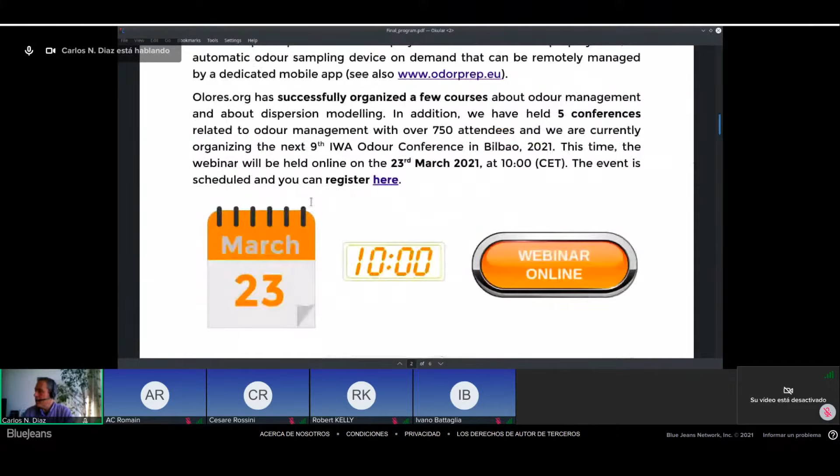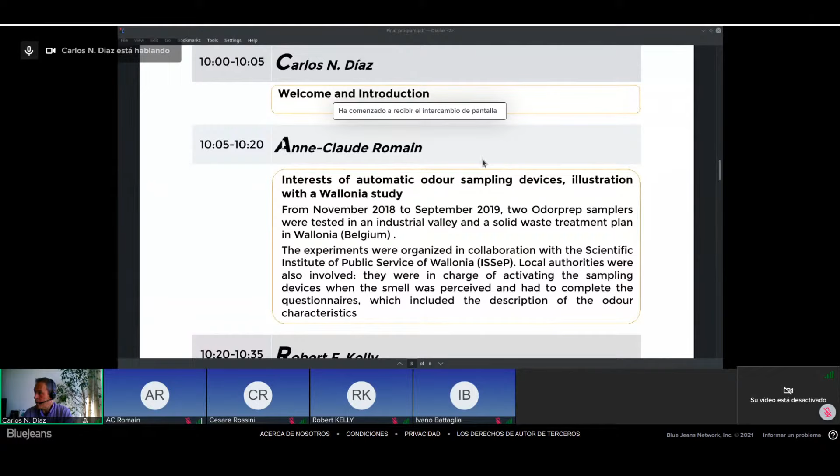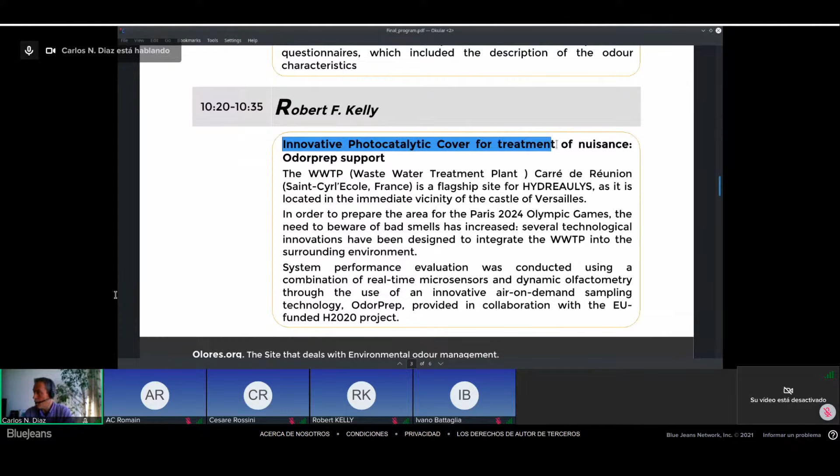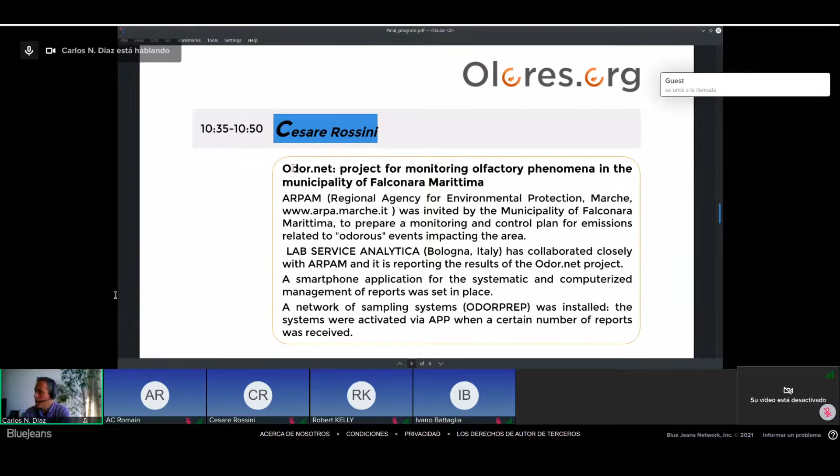So for this presentation, I'd like to comment a little bit on the program. We have first speaker Anne-Claude Romain, who will speak about the interest of automatic odor sampling devices, illustrated with the Wallonia study. Afterwards, Robert Kelly, Mr. Kelly, will speak about innovative photocatalytic cover for treatment of nuisance, Odorprep support. Later, Mr. Rossini, Cesare Rossini, will speak about OdorNet, a project for monitoring olfactory phenomena in the municipality of Falconara Marittima. And our last speaker will be Federico Cangialosi, and he will speak about mechanical biological treatment plants, statistical evaluation of hydrogen sulfide and ammonia concentrations in ambient air, and criteria for automatic odor sampling.

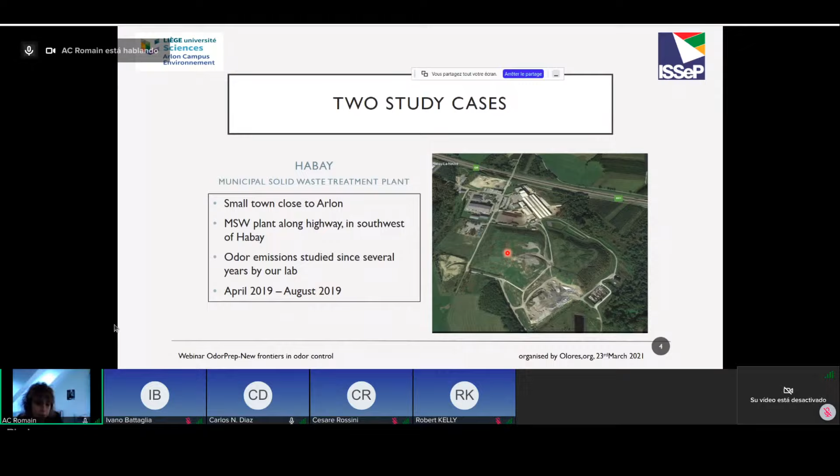So Lab Service Analytica - I'm sorry if I don't use the correct term - Cesare lent us 2 Odorprep samplers for about a year. ISSeP installed 2 trailers equipped with chemical analyzers to perform continuous measurement of chemical compounds. We performed olfactometric analysis, and we used ADMS as an odor dispersion model software.

We also installed our own IOMS, the Instrumental Odor Monitoring System - the new acronym for e-nose - at the Habay site, but I will not focus too much on this today.

What is also important in this study, because there's an app on the mobile phone to trigger the automatic sampling, is to involve external people. In this project we involved 2 environmental officers of the municipality of Engis, and for Habay, a technician of the site, because they have to trigger the sampling with their smartphone, and so they are in charge of doing this.

In addition to this, we give them a questionnaire to fill out at a predefined frequency, and of course each time there is a triggering. This questionnaire, among other things, requires them to mention and characterize the odor they smell, to help identify the source, because as I explained, in Engis there are different sources of odor and different kinds of smell.

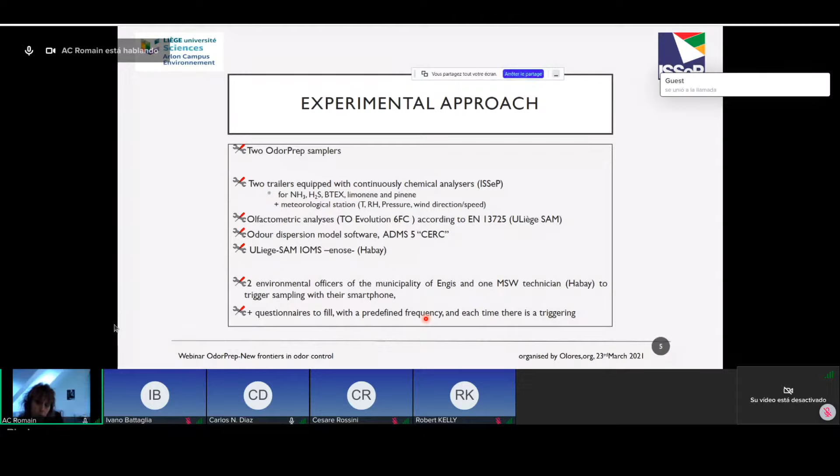So very fast, Engis here, you can see the mouse and the underlying... sorry, I heard something strange. Sorry, it's just the recording. Just go ahead, Claude. Okay.

And so there is an underlying shape here - this shows the different factories in Engis. We decided, for different reasons I can explain later if asked, to localize the sampler here, really close to one of the main odor factories, in the fence line, the parking of this factory, and a little bit further.

The distance is about 350 meters from the parking. It is close to a school, and the officers who have to trigger the automatic sampling are about 1 kilometer, a little bit less, from the automatic sampling system device. For Habay, I will have no time to explain this.

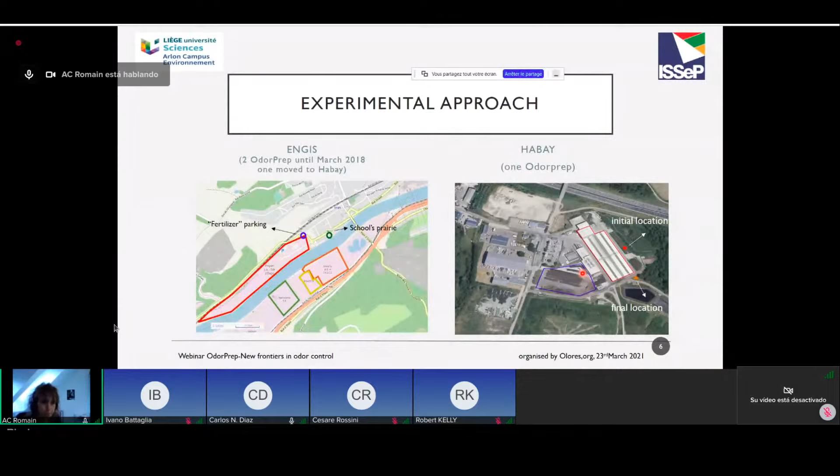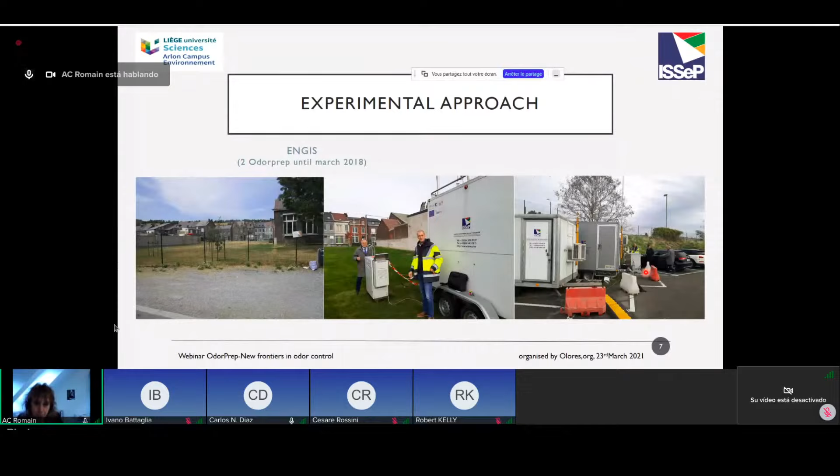I would like to explain more data and results we got in ENGIS, but the time is very short, so I won't have time today to go into more detail. For your information, I will explain them in more detail during NOSE 2021, which is also why I don't want to give too much detail on this result.

But you can see that on the two locations in Engis, we got 6 triggerings, about 5 days during 8 months of study. It's really low, and we are a little disappointed about these results because usually there are more complaints, and we really wanted to get more data for our study. For the citizen, it's great, but for us, it was not so great.

And you can check here the value, the concentration you get, so in the fence line and a little bit narrower, at the receptor level here. We can discuss how we could use this kind of information to perform an odor dispersion model, but I will not take too much time on this today.

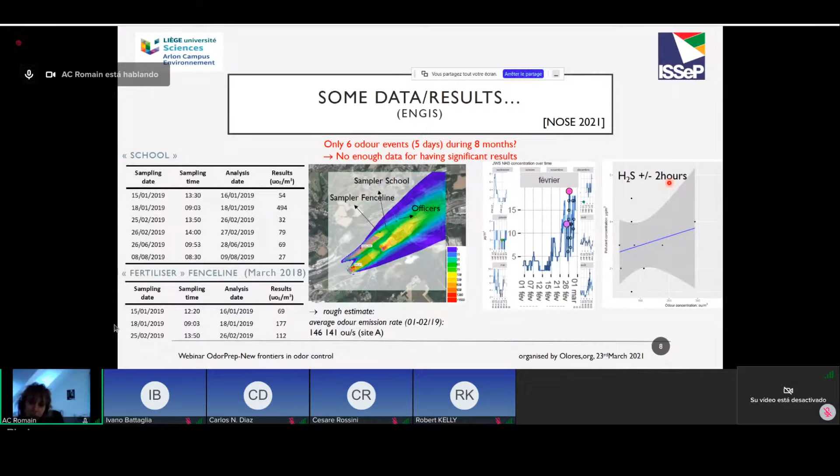This is probably due to the fact that the officer who activates the sampling is 1 kilometer away from the automatic sampler, and even if the analyzer measures chemical compounds continuously, the time the odor takes to reach the officer's nose could involve some delay depending on wind direction and atmospheric stability. So there is something we can discuss here.

So the main scope of this Wallonia project was to evaluate OdorPrep, which is the title at the end of my talk. I'd like to give you my first impression, but this was 2 years ago, so to be honest, I haven't really tried the OdorPrep system since this first experience, for various reasons. Maybe some aspects have changed since that time.

But the good point of this automatic system is that it's really a good approach to collect odor at the receptor level. It's a good way, really a sampling representative of the perception at the receptor level, because it's activated and triggered by a mobile phone app, by a citizen, by an officer, by a company, I don't know. So it's really interesting from that point of view.

As you probably know, sampling at the receptor site is often challenging due to the low odor concentration we have at the receptor, and even sometimes at the fence line. As you all know, especially if you've performed field inspections—I don't know if it's usual for you, but in Belgium it's a method used frequently.

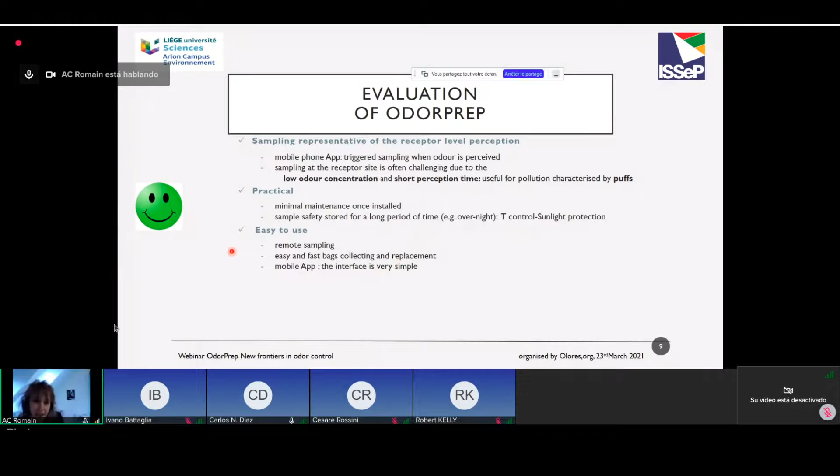So it is easy to use, it's remote sampling, and bag collecting and replacement is really easy to do. The interface of the app is very simple, even for citizens. It's also versatile, so you can add extra instruments with their own sampling line in the device, and it's really helpful from the point of view of material use with respect to our European standard for olfactometry.

However, we had some proposals or some questions that we can discuss, but maybe there have been changes now since 2 years. The trouble could be linked to the electrical supply, because we also have automatic sampling systems with battery.

Because it's quite light we can move it very fast. But here, for temperature control for instance, we need high voltage, so it is important to notice this. If you want to use it, you need access to electrical supply.

The size of the sample bag could be a little bit higher, especially when we are working at the receptor level, because the concentrations are very low.

When we tested the Odorprep system, we only had Nalophan materials at our disposal, but as you know, for some compounds, especially ammonia and H2S, that is not a good one. So I guess maybe they propose other kinds of material.

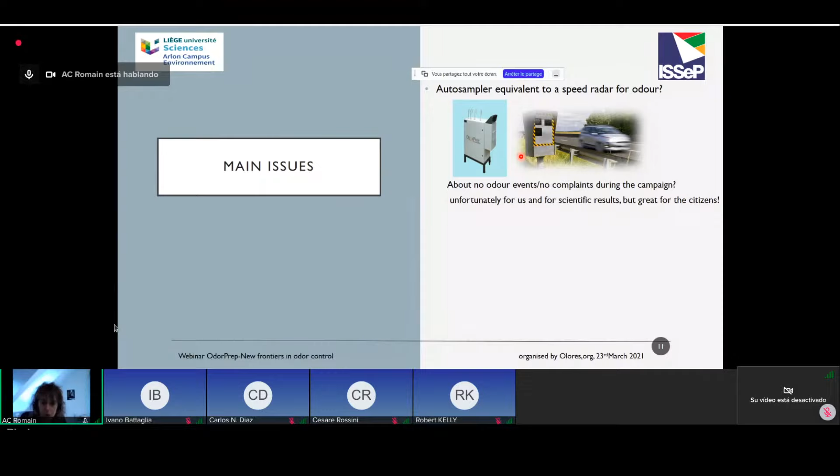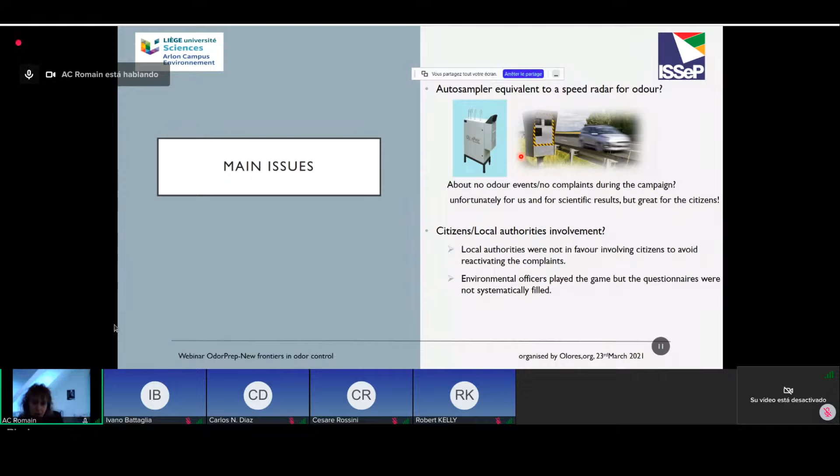Involvement of the citizens was not so nice as we would like to have had, but I have no more time to go into more detail because Carlos reminded me that I don't respect my time as usual. I'm sorry. So I mentioned here the main interest because it was the title of my talk, and I expose here the main interest, but I have no time.

You can read it. However, you will have at your disposal my presentation, and so you can see here the consideration regarding the interest of this system. Thank you very much, and sorry for not respecting perfectly my time.

And thank you to Sébastien. I know he's listening now, and my colleague Noémie, Cédric, David, Axel, and the people who were involved in the 2 case studies. Thank you.

Okay, thank you very much, Anne-Claude. Sorry for this, we just have 15 minutes, otherwise I would be listening to you for a really long time. Yeah, no, thank you guys. I know, it's my problem, it's really difficult to respect the time. Well, sorry. Okay, thank you.

Okay, so our next speaker is Dr. Robert Kelly. Dr. Robert Kelly heads the international team of Suez dedicated to solutions related to odors, located in Paris. Mr. Kelly studied microbiology at the University of Guelph, Canada. Mr. Kelly has a long experience in developing sustainable odor management strategies, including real-time monitoring of nuisance, odor emissions, and impact assessments. So please, Robert.

Today, I'd like to present one of our solutions within Suez, which we call ActiLayer. It's an innovative solution for the treatment of nuisance odors from diffuse sources via photocatalysis. And of course, the link to the previous presentation is how we integrated the use of the Odorprep automated sampling device within two reference projects that I'd like to share with you.

Just to quickly get started, so you have an idea of who our team is, because Suez is a large organization. We're part of a division known as Smart Environmental Solutions, and in fact, we're the Air and Climate division. If you look at our activities, they fall into three main categories.

The first, which we'll focus on today, is really about nuisance odor impact and integrating industrial activities within the local environment. So we're really focused on odorant compounds, volatile organic compounds, H2S, reduced sulfur emissions. We also work more and more on urban air quality initiatives, and you'll see it's similar strategies, but on different types of pollutants, with a link more focused on public health initiatives. So we're talking about fine particulate matter or NO2 emissions.

And then finally, the third category is on surveillance and mitigation of greenhouse gas emissions. So not really an air quality initiative per se, but more linked to climate change initiatives.

But regardless of which of these three areas we're working in, what's important to know is that we operate as a solutions integrator. It means we work with an ecosystem of partners, such as Lab Services, Analytica. We're not only working with in-house solutions, we're trying to bring to our clients the best of technology that's available on the market. And we're present along the entire value chain. It means beginning with a diagnostic phase, typically, to understand, really to characterize the nature of the problem, the type of pollution, the scale. Am I talking about a single source or an entire plant or an entire city?

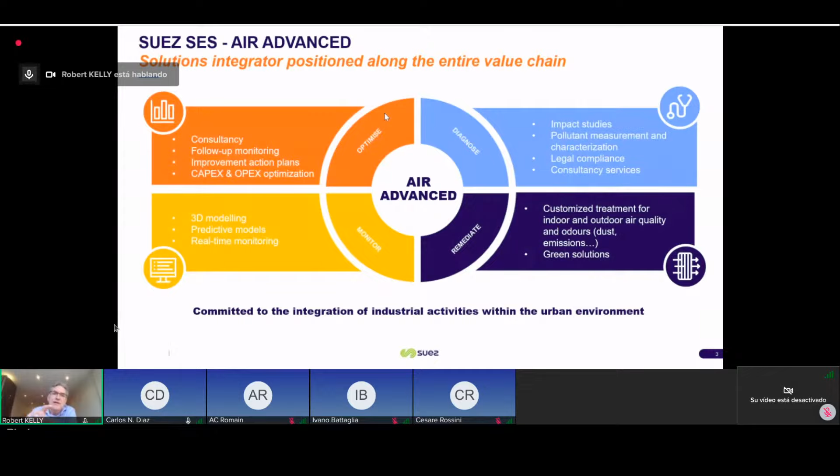And then we move into treatment, remediation solutions. Once we've put in place a treatment system, we have an increasing interest in real-time performance monitoring. And finally, when we have these types of digital platforms, we're building up online databases. And so now we can have a big data type approach, try and optimize plant operations, for example. So we have this continuous improvement process.

But really, irrespective of the project, our main focus, our commitment, is to identify strategies to better integrate industrial activities, industrial infrastructure within an increasingly urban environment. I'm sure many people have noticed that infrastructure such as wastewater treatment plants, composting facilities, landfilling activities, or even industrial parks are really facing urban encroachment.

It means we have residential neighborhoods coming up right up to the fence line of the facilities. And so we have to come up with innovative strategies to go beyond just risk management and to really focus on environmental footprint and really having a more proactive approach in terms of quality of life for the local community.

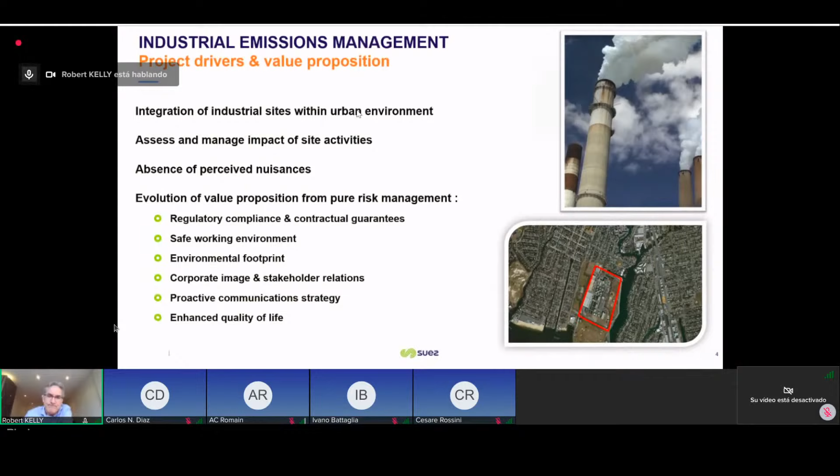So with that, I'd like to focus on really two technologies today. The first on the treatment side is our ActiLayer technology. You can see here an installation that I'll focus on just outside of Versailles. It's a photocatalytic cover. But what's interesting is that it really performs a couple of functions in one. Well, first of all, it's a cover, so we have confinement of emissions. But here you can see a simple schematic of how it's made.

So we have an activated carbon layer, so we have adsorption of any pollution below the cover. We have an integrated titanium dioxide catalyst, which with UV irradiation, so sunlight, is going to produce free radical species that will degrade any pollution that is adsorbed in the activated carbon layer. So we have complete mineralization of the pollution and regeneration of the activated carbon.

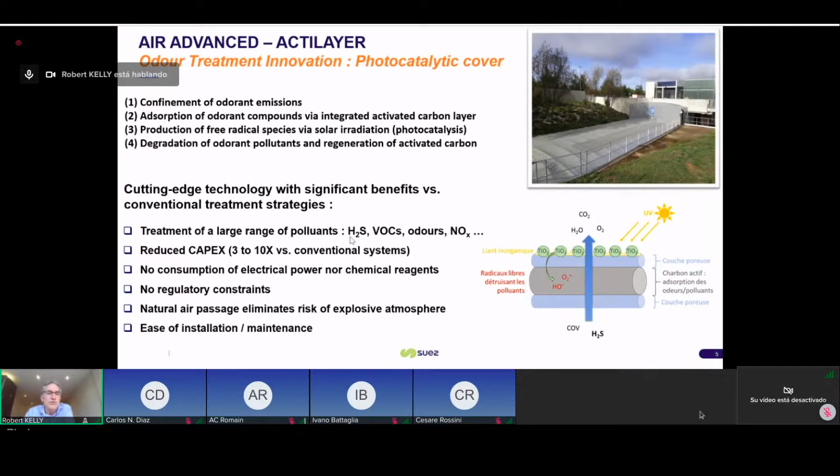So for us, it's a very interesting strategy for treatment of really difficult emission sources, open air tanks or here canals with diffuse emissions, much lower capex than a traditional approach where if I had to put in place a concrete cover, a ventilator to extract the air, and a dedicated odor treatment system. I have no electrical power nor chemical reagents, so very easy to put in place and to maintain.

And of course, the second innovation I'd like to focus on with these couple of references is the Odorprep device. Anne-Claude presented it earlier. Really what is of great interest to us is the ability to do remote sampling on demand by plant operators, by a system administrator in the middle of the night whenever we have an odor event. And also the fact that we can tailor the configuration of the device to have different types of sampling.

So we can have a Nalophan bag for collecting an air sample for dilution olfactometry, or we can put in a Tenax cartridge for VOC screening, for example.

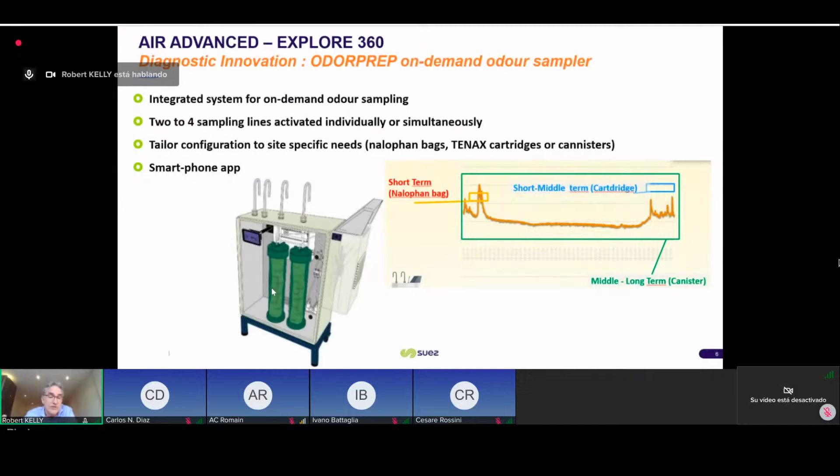Let's walk through two use cases. This is the Carré de Réunion wastewater treatment plant, in close proximity to the Chateau de Versailles. Here's the inlet wastewater channel, an open air channel approximately 200 square meters in surface. There's a new tramway passing directly in front of the plant, and in 2024 the equestrian show jumping events will be located quite closely. The local mayors are very sensitive to this open air source and asked us to come up with solutions.

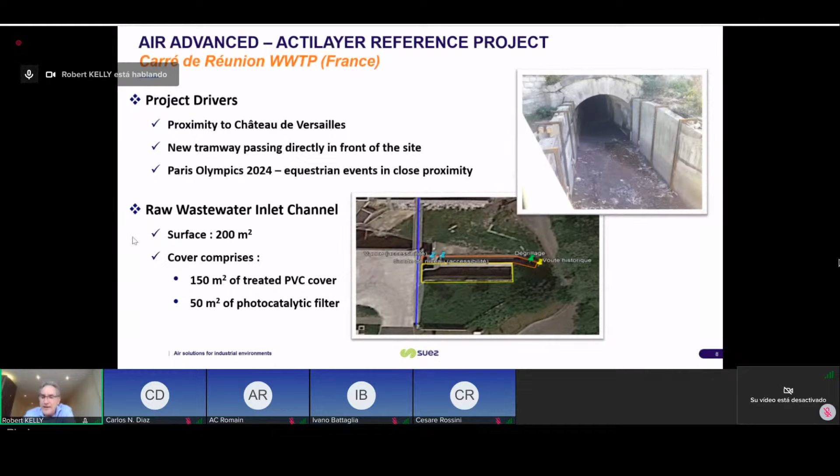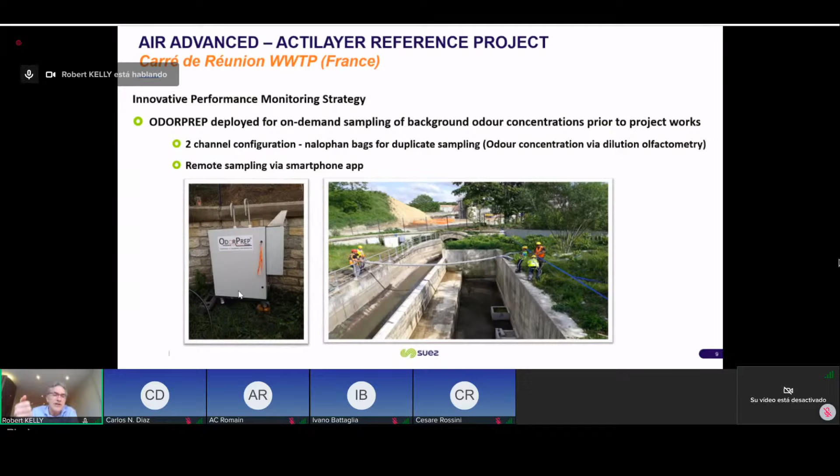After comparing different alternatives, we decided to proceed with a photocatalytic cover. We used the Odorprep as an innovative performance monitoring strategy, first sampling before we put the cover in place over several months to understand background odor concentrations. The Odorprep was configured with two parallel channels, with sampling bags for conducting odor concentration analysis in the lab via dilution olfactometry. We could remotely sample whenever the plant operators told us there was a nuisance event in the vicinity of the channel.

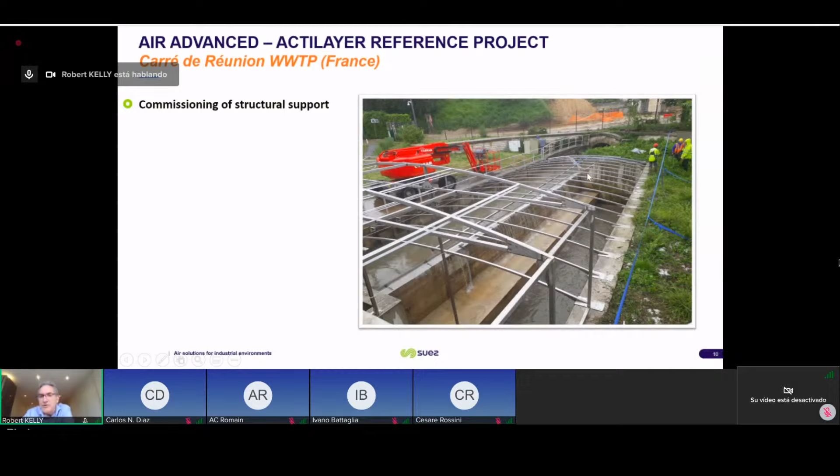Some images of putting the cover in place. We put in a quite sophisticated support structure because the vault was actually a national monument from Louis XIV, so the client wanted to preserve this vaulted look of the overall finish. Here you see us putting the actual cover in place, and a close-up on the photocatalytic filter patch. You have a chemically resistant PVC cover, and then these photocatalytic filter patches placed using heavy-duty Velcro at intermittent intervals integrated within the cover.

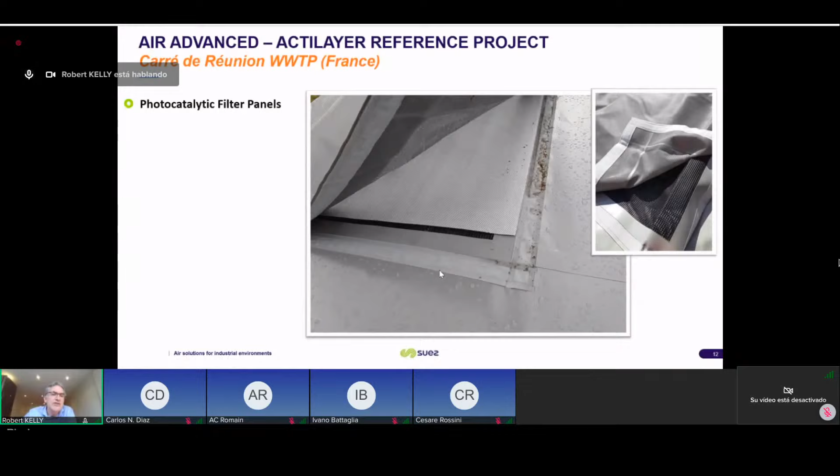We then continued sampling with the Odorprep device once the cover was in place, and we also used microsensor technologies to sample directly in the channel below the cover and directly above the cover.

Using specific measurements both in the lab and with dedicated microsensors, we also sampled for some recalcitrant odorant compounds. Again, we bring it to below detection, and we're above 80-90% removal efficiency.

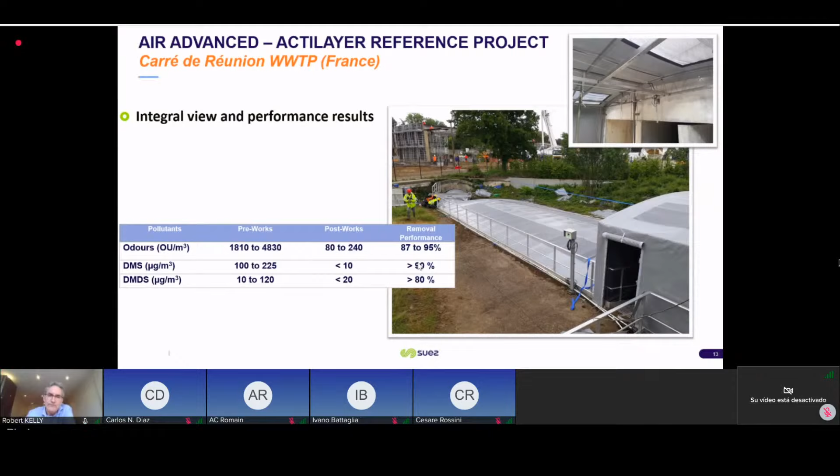Let's focus on a second reference case to give you another idea of how we used the Odorprep. On the first project, it was a loan from Lab Services Analytica, part of an ongoing European initiative to test the Odorprep device. We were absolutely convinced of its interest, and subsequent to that first trial we purchased 2 units for use on this next project.

Here we're dealing with a different type of project: an industrial remediation subsequent to an industrial warehouse fire. This image shows the fire, where a chemical warehouse was storing highly odorant compounds. Our project within Suez and our partner consortium was to demolish the remaining structures and remediate any waste debris on site. We also had a lot of barrels in various states of degradation that needed to be remediated on site.

What was very important for the client was to have real-time air quality monitoring, but also nuisance odor impact monitoring, as a critical decision aid tool to help manage the on-site works with as little impact on the surrounding neighborhoods as possible. This is directly inside the city - we have apartment complexes a couple hundred meters away. This was also highly publicized with a lot of news media coverage, so we wanted a very transparent and reassuring communication strategy.

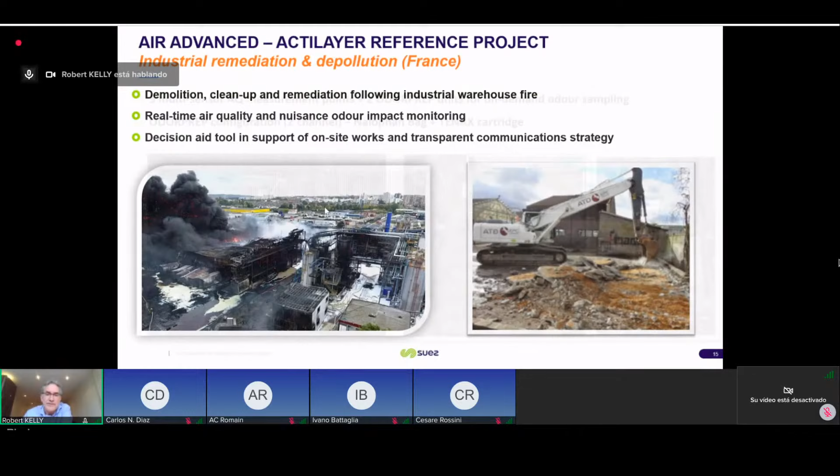What we put in place was a combination of multi-sensor real-time air quality monitoring stations. We put a network of 5 monitoring points around the remediation works.

In this particular case, we configured each of the Odorprep units as dual channel units, with sampling for dilution olfactometry but also Tenax cartridge, because we knew VOC emission screening was a big part of what our client wanted to focus on.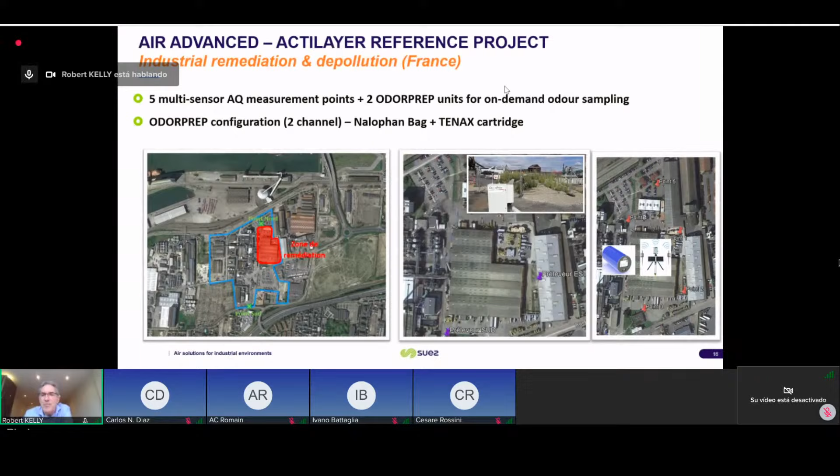The other critical highlight of this project is that we had to build a temporary support, a tent, for handling the most sensitive of the waste. These uncombusted barrels of compounds that were highly odorant were taken inside this tent for cleaning and pre-treatment before taking to an offsite waste handling facility.

So here what we have is a combined ventilation and air treatment system where the photocatalytic filter panels are directly built in - these are coated canvas ventilation gains with the photocatalytic filter panels integrated within one face of the ventilation gain.

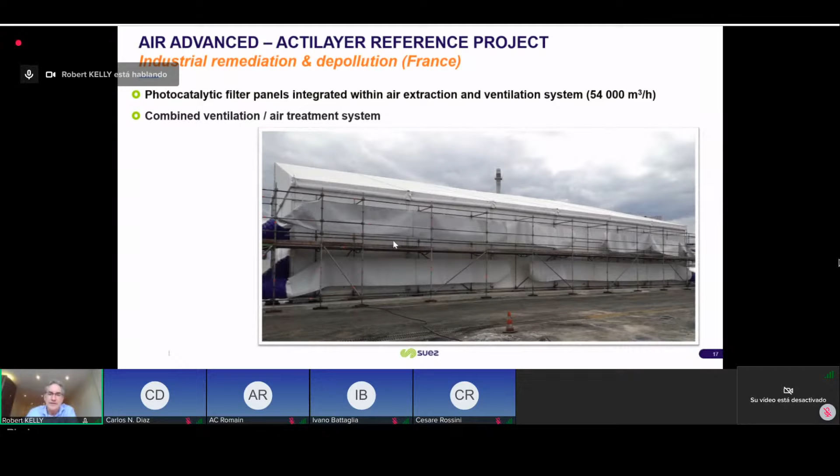Again, we used the Odorprep both at the very beginning of the project when we were testing to better understand what types of compounds we were dealing with and the odorant effects. We used it inside the tent as a sort of pre-screening test initially, where we were collecting samples whenever the operators informed us that we had highly odorant species present.

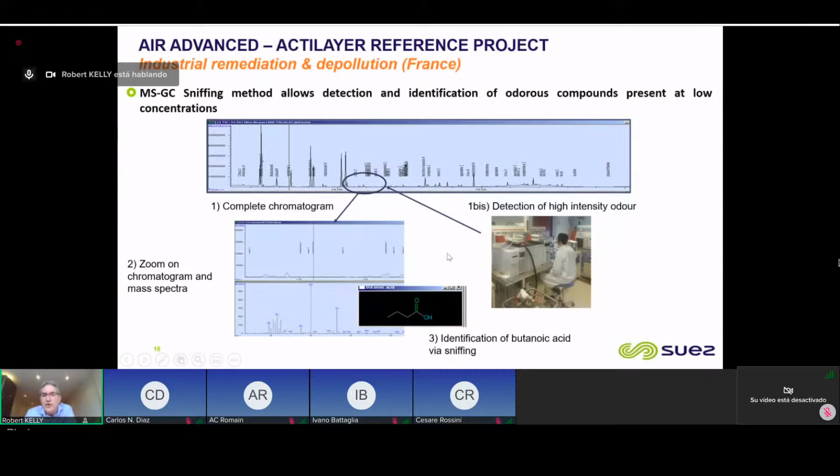We would collect on-demand sampling and then send it to the lab for MS-GC sniffing. The advantage is, even for compounds that were present in very low concentrations but high intensity odor, we could try and identify the compound.

We also used the units once the project was up and running and our treatment system had been properly tested and validated. We installed the Odorpreps at the 2 points I mentioned, at the limits of the remediation works, to survey in real time and do both automated sampling whenever we had a resident complaint, but also programmed sampling, because we had environmental reporting to do throughout the project. So what I can show is that on the limits of the works, we never had odor concentrations that exceeded 75 odor units per meter cubed.

And in the vicinity of the tent, comparing the interior versus the exterior, we showed on the order of 75 to 90% removal of both total VOC compounds and total reduced sulfur compounds. So very efficient performance.

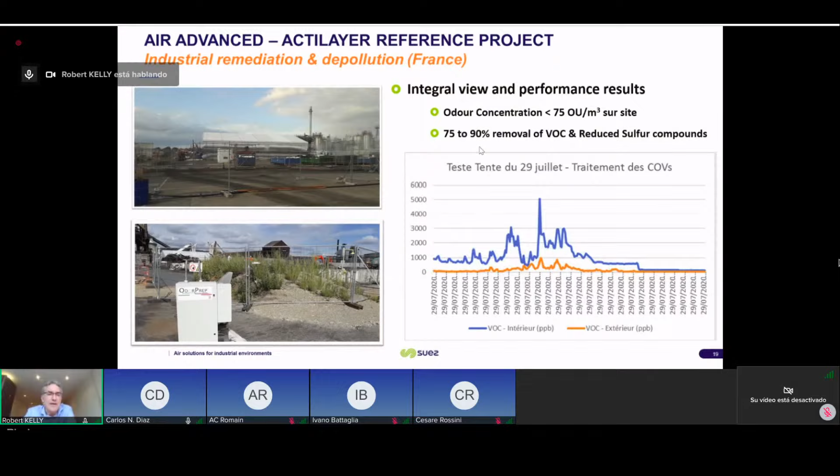You have 1 minute, Robert. And that is the last slide, Carlos. So that works out just wonderful. Fine, I'll be happy to answer any questions later on during the roundtable.

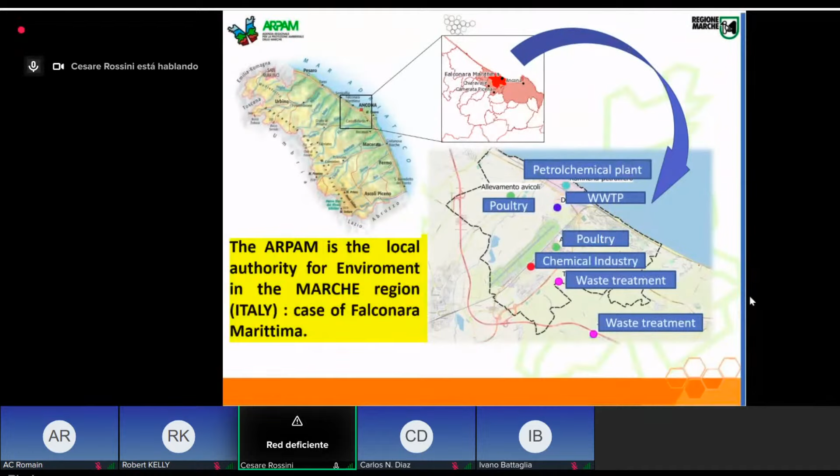ARPAM is the local authority, one of our 20 local authorities that take care of the environment in Italy. In this specific case, the local authority of the region Marche has studied the case of Falconara Marittima, a nice little town on the Adriatic Sea in north-central Italy. The area that ARPAM wants to keep under control has a different environmental pressure of anthropogenic origins.

In this area, there are relevant infrastructure like the Adriatic Railways line, the State Road Adriatica, the civil airport, and first of all, there were important industrial activity that due to the impact with the ambient, they need regional and provincial authorization. So I am referring mainly to petrochemical plant, wastewater treatment plant.

So what was the target? The target was to enrich and integrate the knowledge of air quality in the municipality with a monitoring system for pollutants related to olfactometry, nuisance, and volatile organic compounds.

So what was the starting point? The starting point was that in this area of Falconara Marittima, citizens have long been concerned about the presence of odor and related discomfort. But the report was done by telephone. The telephone reports were collected by the municipal administration and police, but were not treated in a systematic manner regarding the entity, the type of perceived odor, the weather condition, and the wind direction.

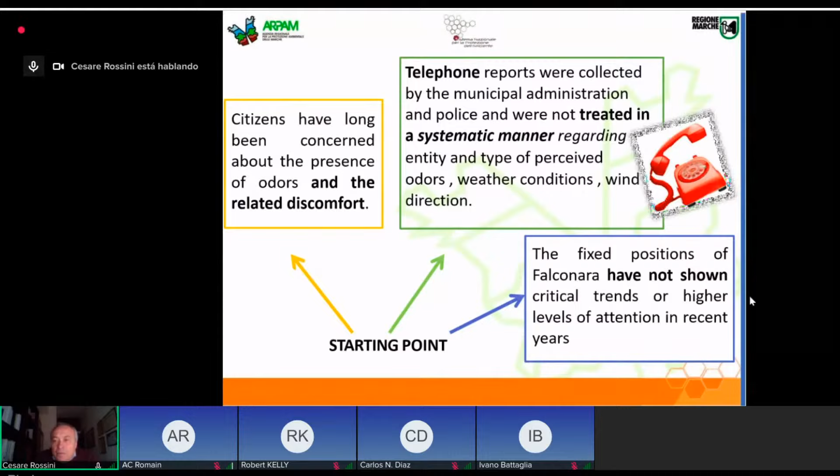And the other point was that the fixed position for controlling the air didn't show in the past a critical trend that was a clear message of what was going on regarding odor.

So ARPAM, the local authority, was invited by the municipality of Falconara Marittima to prepare a monitoring and control plan for emission related to odorous events impacting the area.

This plan is based on the computerized and geo-referenced management of complaints of olfactometry harassment by citizens and allows you to activate immediate intervention capable of answering the following questions: which area of the city is the most affected by odorous events? What are the trace substances present in the air and at what concentration? And last but not least, what are the sources of emission?

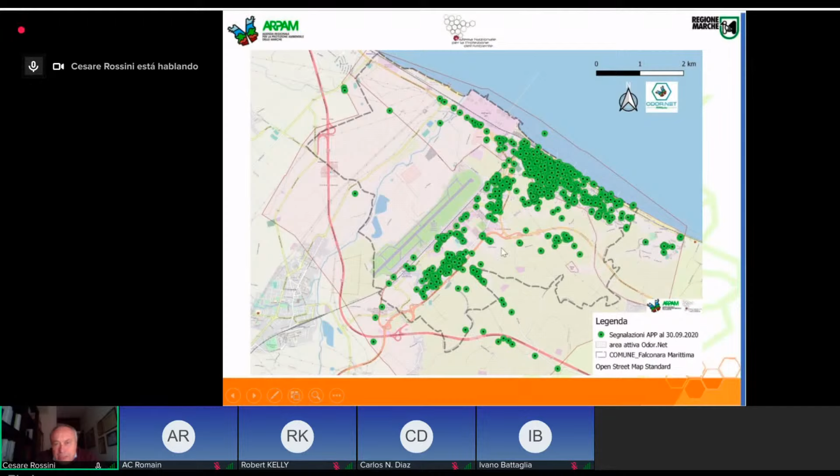And what is also worth mentioning here is that there was a growing interest in the population in being part of the GIS exercise. At the beginning, only 41 people took part in the exercise, at the start, but at the end of the process, 340 people were participating. So this means that the population liked to be involved in this type of surveillance and exercise.

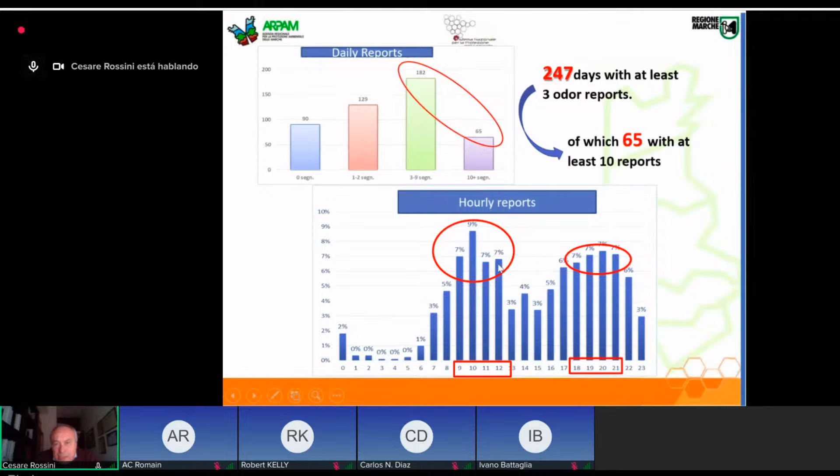Looking at another piece of information that was very clear, there were definitely 247 days where at least 3 odor reports were reported, but you see here 65 days with at least 10 reports. And also another interesting observation is that the peak time is around 10 o'clock and around 8 o'clock p.m.

The other information from this surveillance program was that 66% of the odor reports reported the presence of hydrocarbon-like odor. Clearly, the presence of the petrochemical plant is dominating the situation here. And also important to see is that more than 80% of the total complaints were evaluated as very strong or strong, as you see from this diagram. So definitely the impact on the population was heavy.

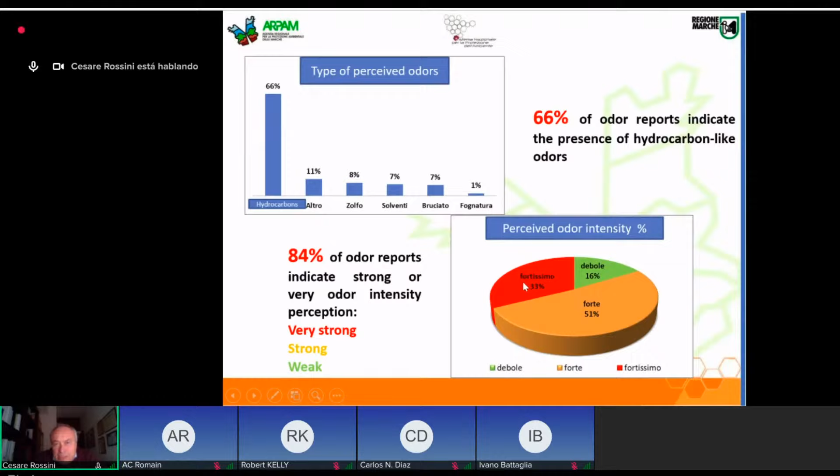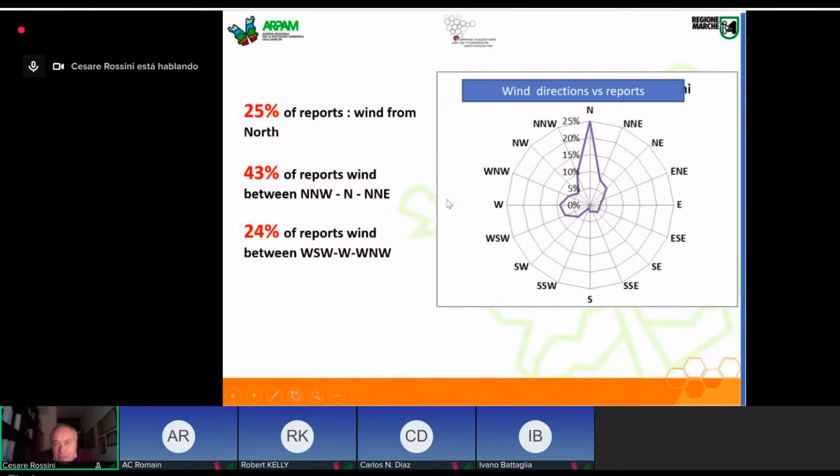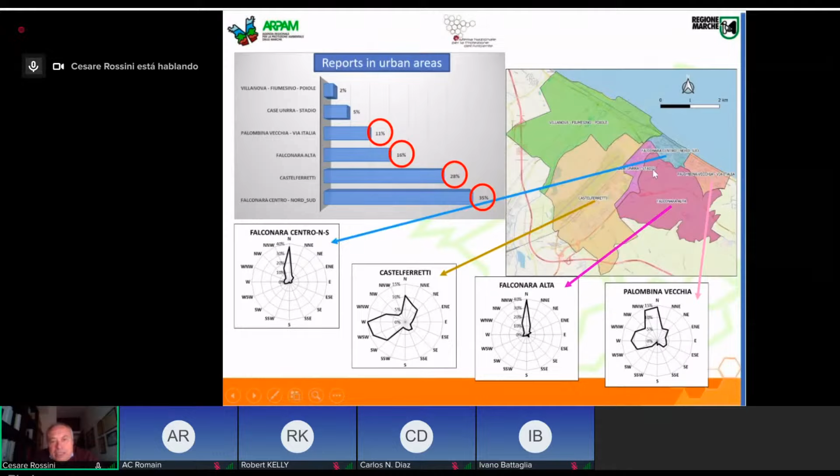Here we also collect information regarding the direction of the wind, which mainly arrives from the north when you are perceiving the event. The study of the complaints shows the highest concentration is in this site, in Falconara Centro, and this area also has the highest level.

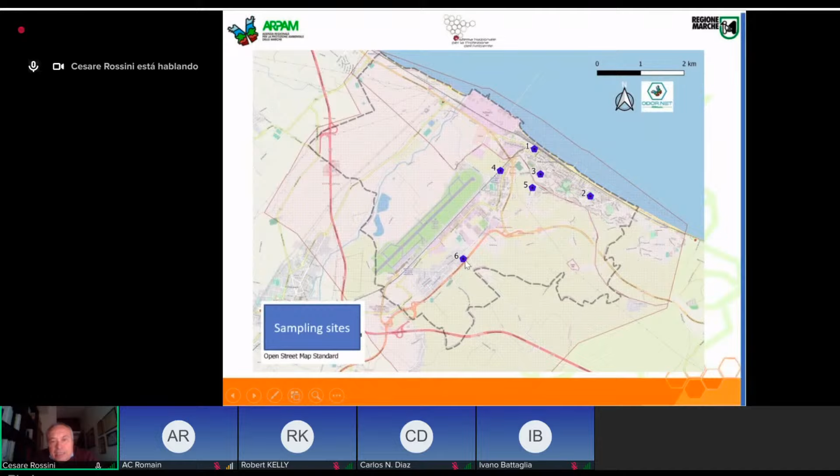We decided to have a fixed position for measurement. Five of them are very close to the sea, and one is more inland, close to the airport. The starting date for the sampling was July 2020.

Each sampling station consists of a Nalophan bag, two Nalophan bags, and a chemical cartridge. In addition, there was a PID detector analyzer for real-time monitoring of total VOC compounds, just to have a second source of information. There was also a weather station.

The chemical cartridge and the Nalophan bag were analyzed for the identification and quantification of the compounds present. Compared to the other exercises done by Claude and also by Robert, here the local authority decided to have only a chemical measurement, due to the fact that they have a lab able to perform this type of analysis locally.

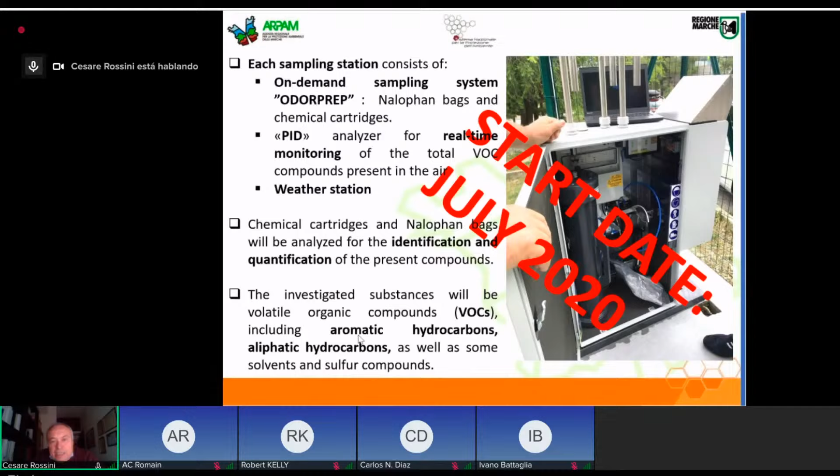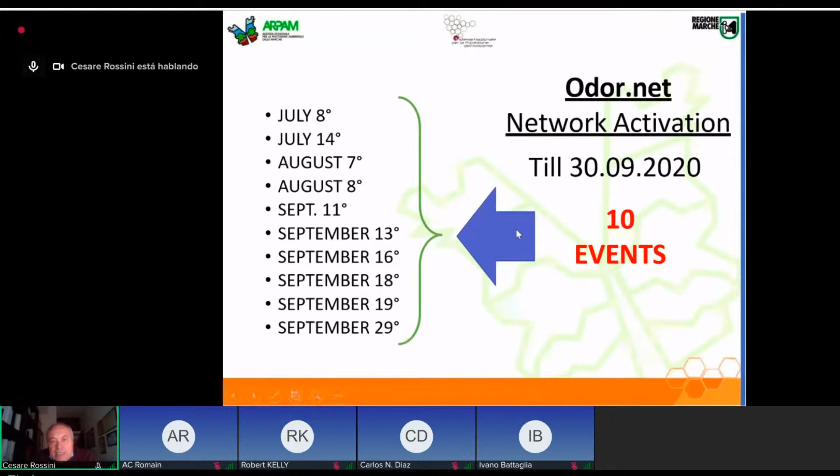So the local authority decided to use this tool to investigate the volatile compounds, including all the different compositions. What's worth noting is that during the summertime, we had several events—ten events. I will show only two of these, which are fundamental for understanding what was going on.

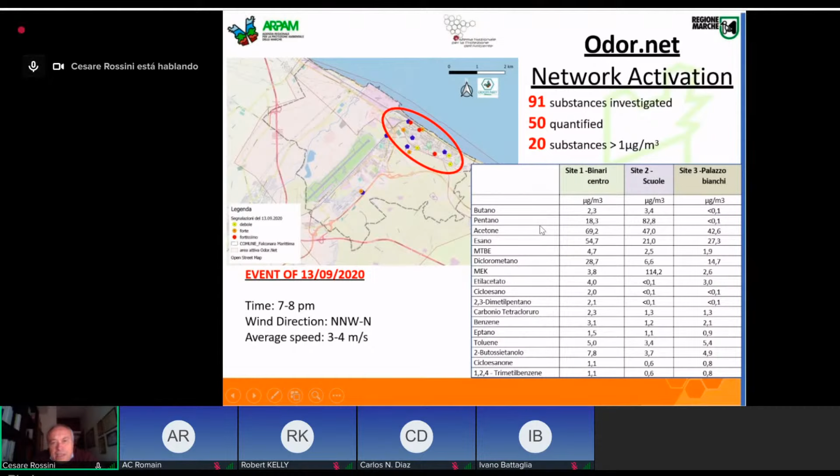For the event on the 13th, there was a huge amount, a greater quantity of reports close to the sea. So we activated three Odorprep units, and here you can see all the different compounds that were measured by this instrumentation. For the same event, there was another occurrence some days later, and we activated the other three Odorprep units. Again in this case, we did the analysis.

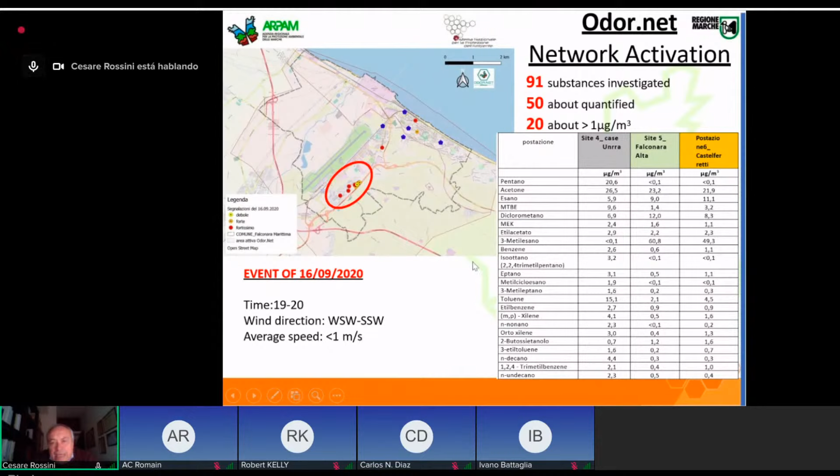To summarize, since time is running out: what's next? The next steps are increasing the number of results and cases available over time. Statistical analysis can provide us with more information on the characterization of odor events, in order to also associate them with the production process. This is the final goal.

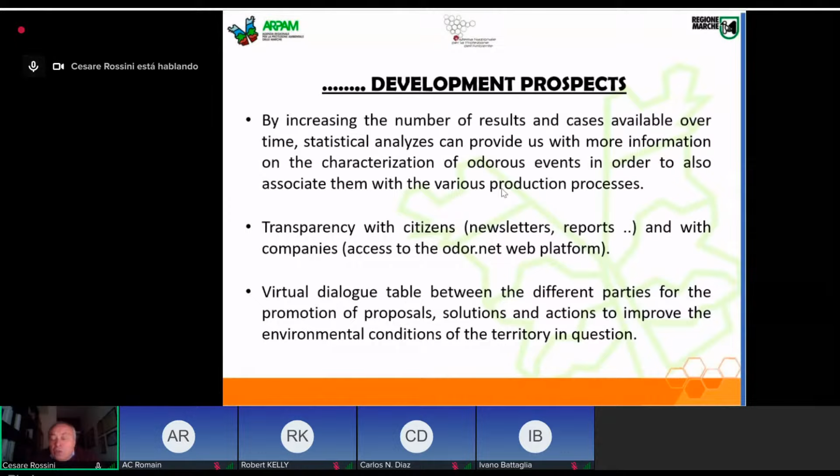Transparency with citizens will continue, as will the connection with local industry. Thanks a lot for your attention. I hope this story has been interesting for you, and I hope to see you during the discussion for additional information.

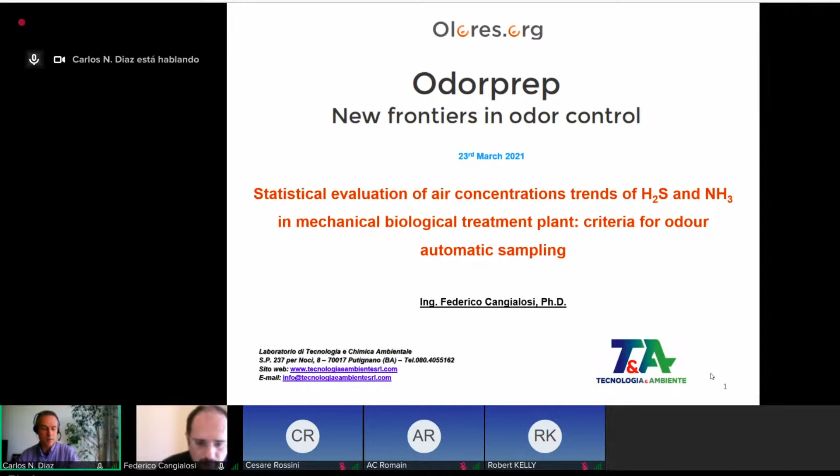Okay, thank you, Carlos. Can you increase the sound of your microphone a little bit? Can you hear me now?

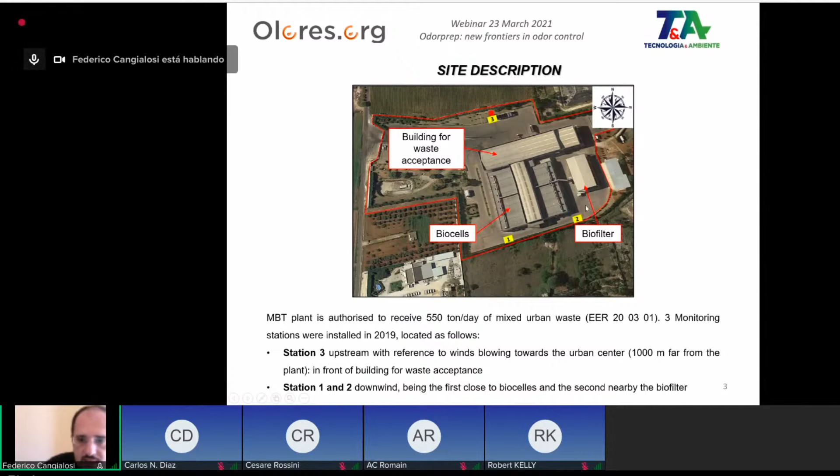The site is a mechanical biological treatment plant authorized to receive 550 tons per day of mixed urban waste. Three monitoring stations were installed in 2019, located as follows: station 3 was located upstream with reference to winds blowing towards the urban center, which is 1 kilometer from the plant, in front of the building for waste acceptance. Stations 1 and 2 are downwind, with the first one located close to the biocells and the second one close to the biofilter.

Each monitoring station was equipped with an H2S analyzer, an ammonia analyzer, and a VOC gas detector, with the Odorprep V3, and we also had a weather station in station 3. The system was completed with a data acquisition, processing, and management system.

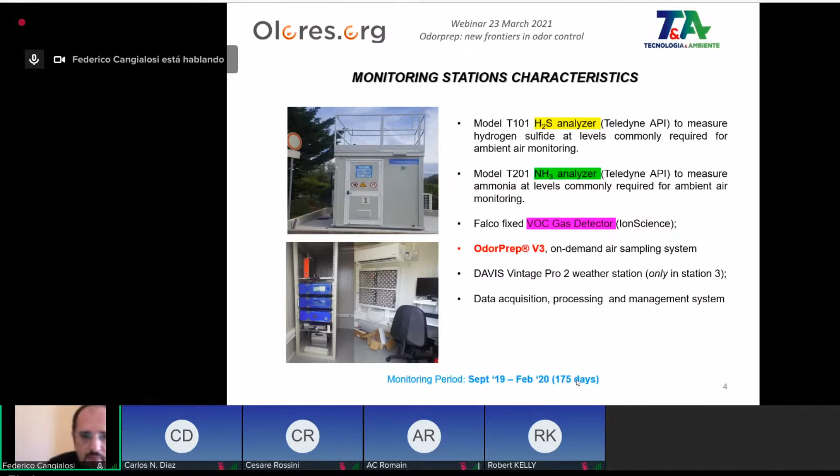The monitoring period for this study went from September 2019 to February 2020, about 175 days. The first look at the data we give in this presentation is the time series analysis.

We look at the data from station 3 and station 2. Remember, station 2 was close to the biofilter and station 3 in front of the building for waste acceptance. We can see from this data the concentration of VOC. The 98th percentile for station 3 and 2 are quite similar. Apart from very high values on some days, we see quite low concentration, and we can see a cyclical daily component in the data. So it seems for this data that VOC is not related to the fluctuations of the emissions from the plant.

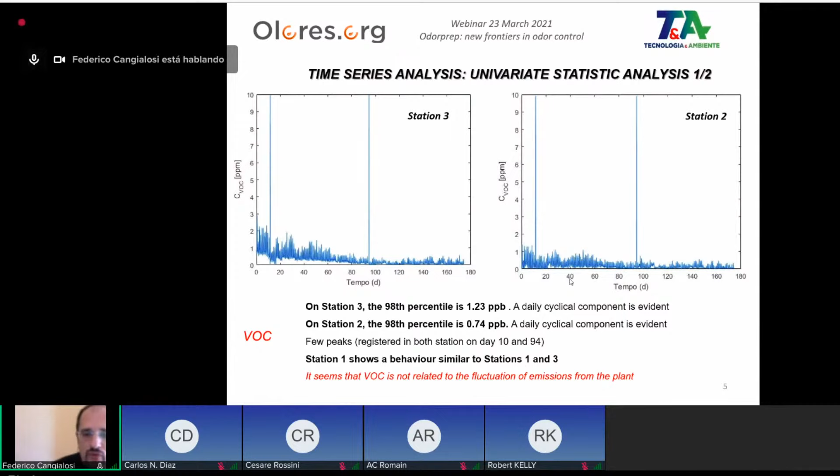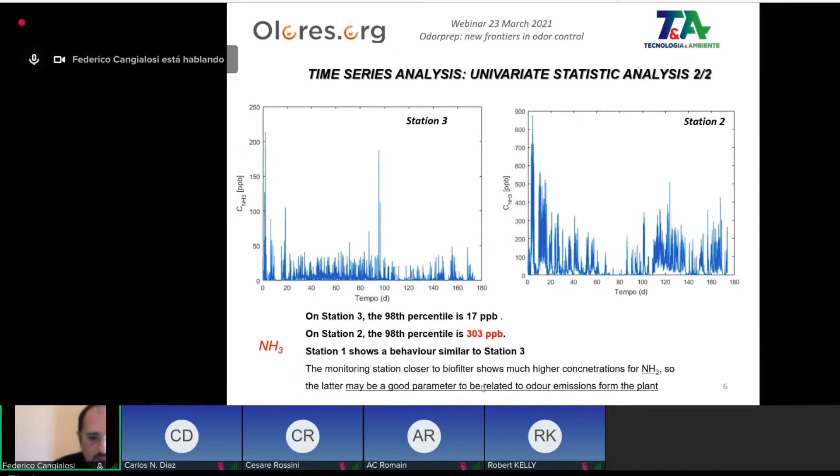We also performed a kind of analysis we call persistence analysis. Persistence analysis searches for time intervals in which a certain threshold value, y, has been exceeded consecutively for more than x minutes. Some instruments have a sampling frequency of 1 point each 5 minutes, so we decided that we can define an odor persistence if the concentration is above a certain threshold for more than 5 minutes.

For the threshold values, we look at different concentrations. Three values were selected for each station and each compound: two values were below the 98th percentile, and one value above that. For stations 1 and 3, the values are the same order of magnitude, while in station 2, especially for ammonia, the values are quite higher.

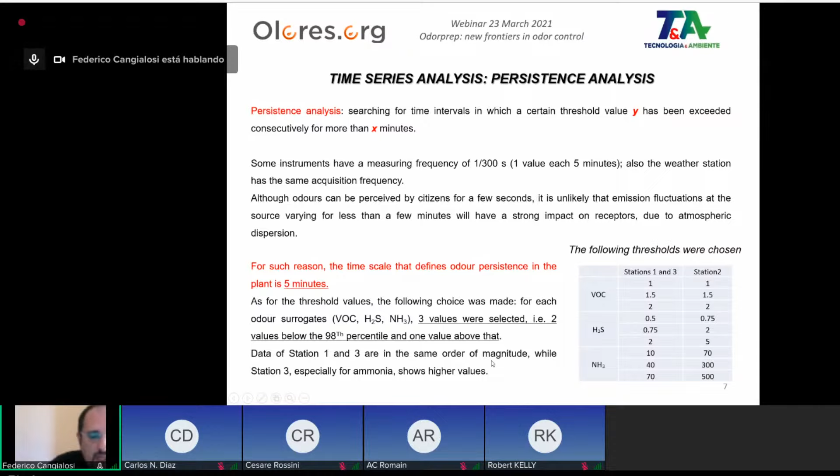The persistence analysis philosophy is to analyze the temporal distribution of persisting events. If we have n persisting events uniformly distributed during the monitoring period, as in this picture, and if we look at the cumulative persisting events, we have a straight line. If instead we have n persisting events distributed during two specific time intervals, like in this picture, the cumulative event distribution has two steps, like in this picture.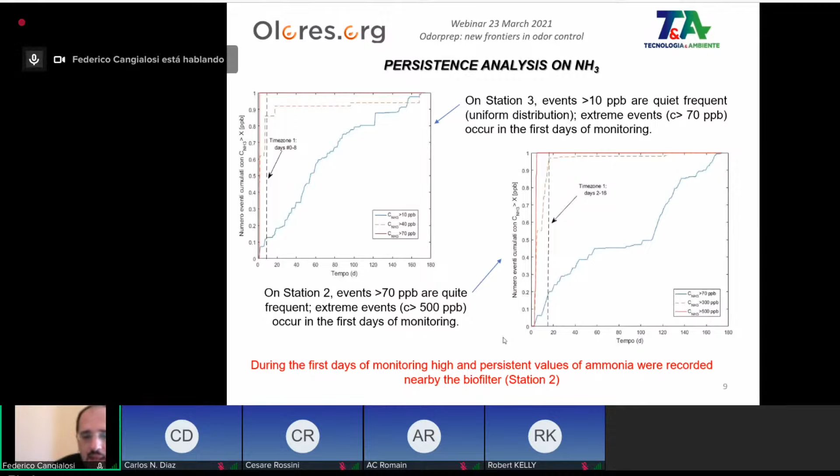When we look at station 2, close to biofilter, events above 70 ppb are quite frequent, and we see here the step: the first 70 days and the last 70 days show frequent exceedances of this concentration, while extreme events, when ammonia concentration is above 500 ppb, occur in the first days of monitoring. So we can say that during the first days of monitoring, high and persistent values of ammonia were recorded nearby the biofilter in station 2.

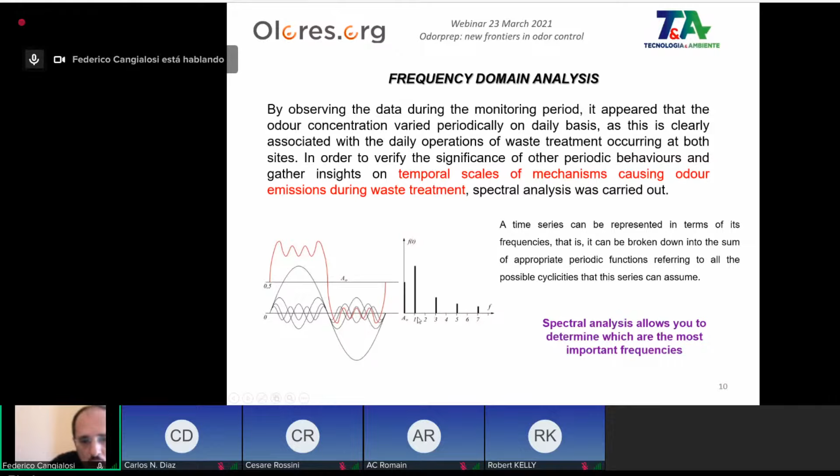Another mathematical tool interesting for analyzing the data acquired on a plant is the frequency domain analysis. We can analyze the time series and break down the concentration values into the sum of appropriate periodic functions, referring to all the possible cyclicities the series can assume. The concentration variation can be considered a sum of different values of different frequencies, which can be depicted in this picture representing the spectral analysis.

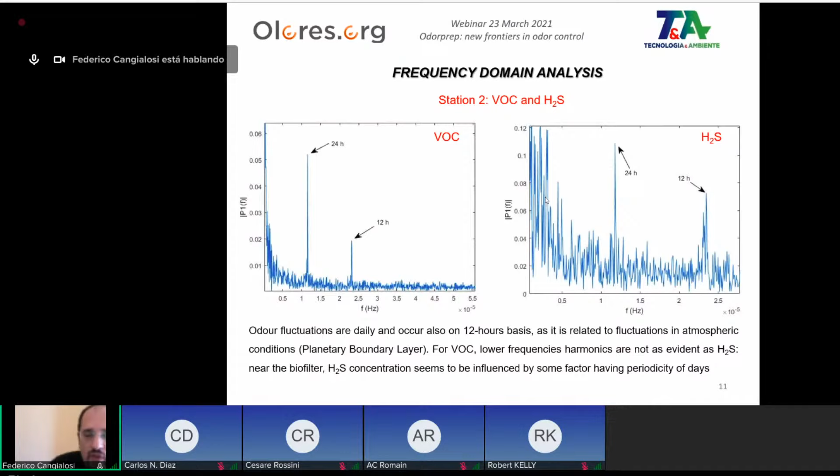For VOC, lower frequency harmonics, located here in the picture, are not as evident as for H2S. Near the biofilter source, H2S concentration seems to be influenced by some factor having a periodicity of days more than hours. This is more evident for ammonia. For ammonia at station 2, we can see evident harmonics on 8 days and 5 days.

It's very likely that these fluctuations are associated with emissions that follow the cycles connected to waste acceptance in the plant and waste biostabilization, which has a duration of 14 days. So we can say that ammonia is the parameter which is closely related to fluctuations in odor emissions derived from waste treatment in the plant.

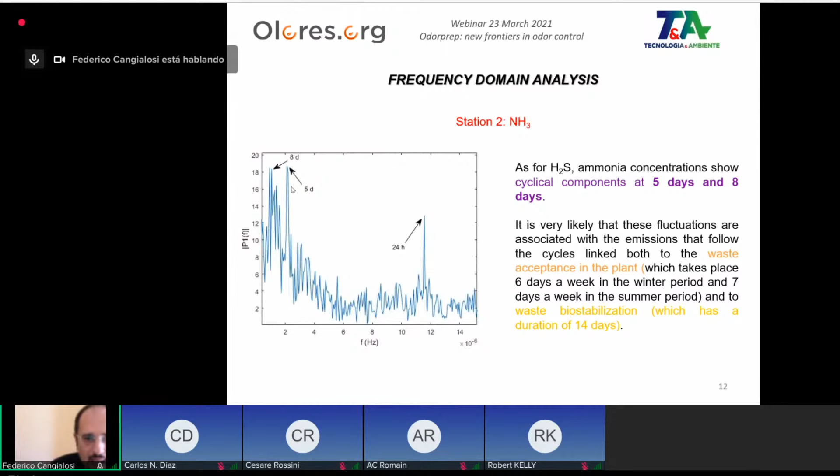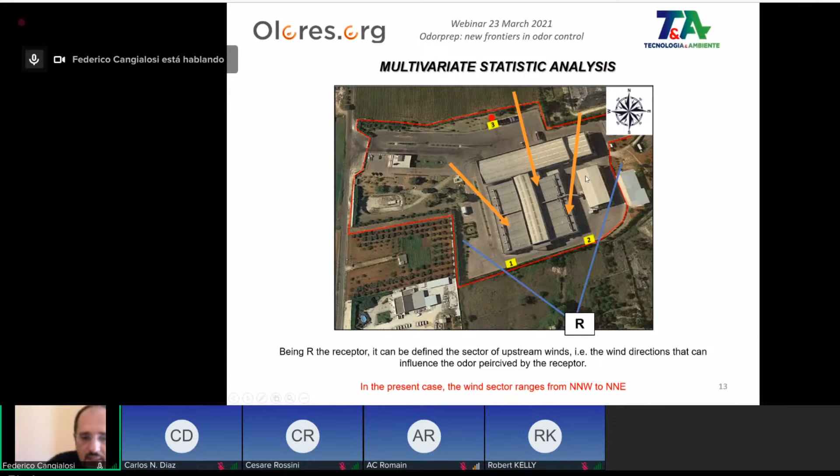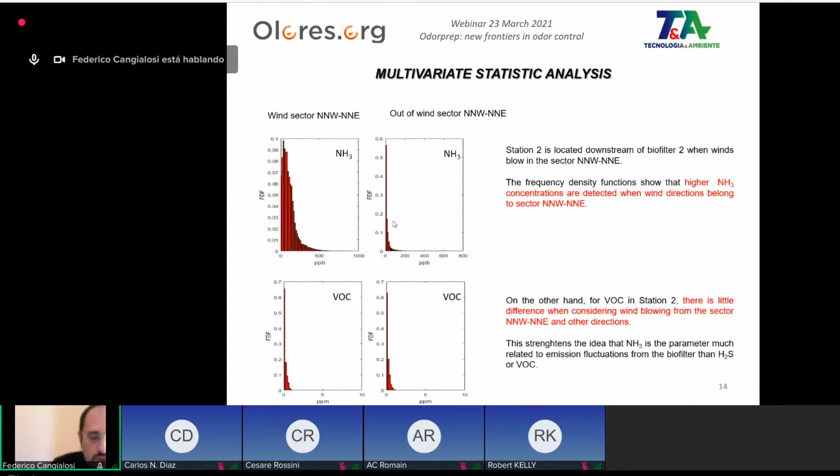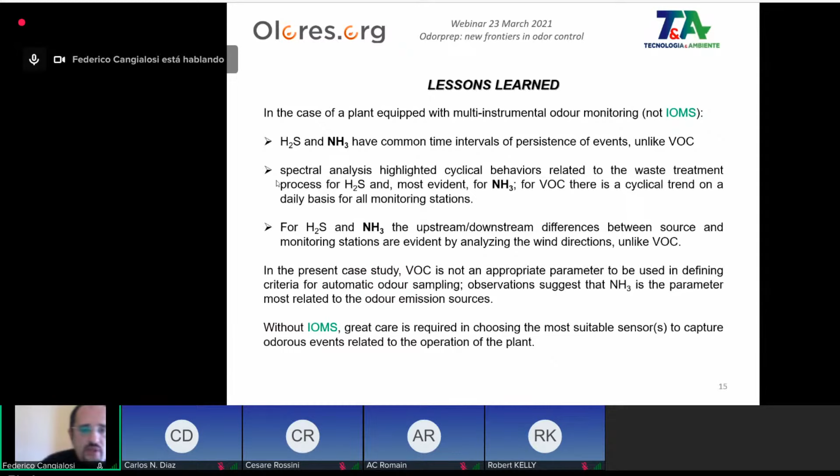So we can define the following criteria for Odorprep automatic sampling. First, we can consider that ammonia should be the only parameter to activate the automatic sampling, as its concentration is clearly related to biofilter emission, as we saw with multivariate statistical analysis.

The time series shows cyclical components related to the time scale characteristic of the waste treatment process, as we saw with the frequency domain analysis. Time windows of 5 minutes, beyond which we can find exceeding of a certain threshold, are adequate for taking into account medium and high persistence events. So on the basis of time series analysis, we can set a threshold of 500 ppb.

In the period of analysis, we observed a total of 79 events of concentration higher than this value for 5 consecutive minutes. These events during the monitoring period generated a very low number of reports from citizens, so we can say there is little evidence that this value, 500 ppb for ammonia, may be related to nuisance to the population. So we introduced the concept of a pre-alert threshold.

Each time the pre-alert threshold is exceeded for 5 minutes, it will be recorded on a web platform and an email will be sent to the local EPA.

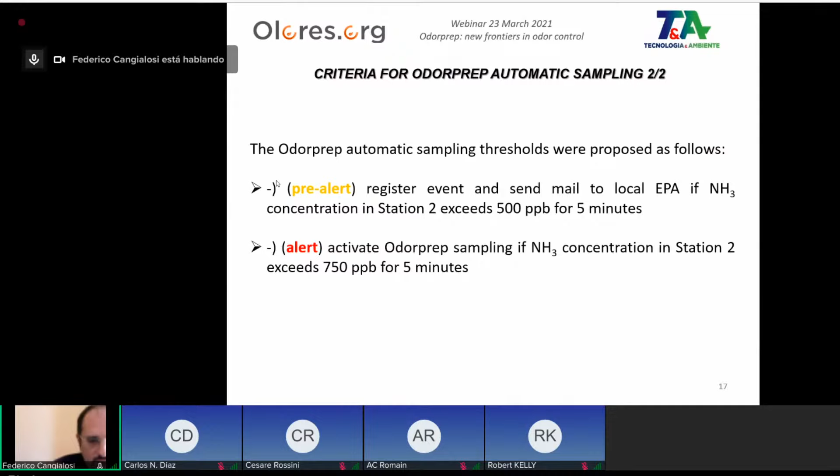This system has been operating for the last 2 months, and so far we did not receive any alert activation. So we will see with the other data in the next month. Thank you.